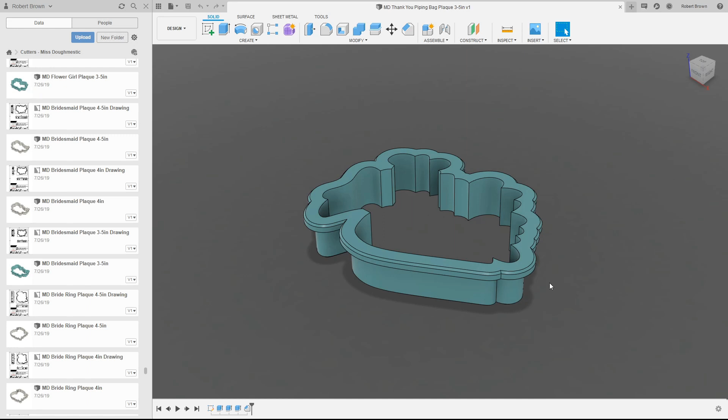These cutters will work perfectly fine. They just won't necessarily be as sturdy as you're used to with our cutters that we print ourselves. We've done this to help you guys lower your printing times. We know some people may be printing these on community printers with time limits, so we're wanting to do everything to help you get a good cutter quickly with as little material as possible.

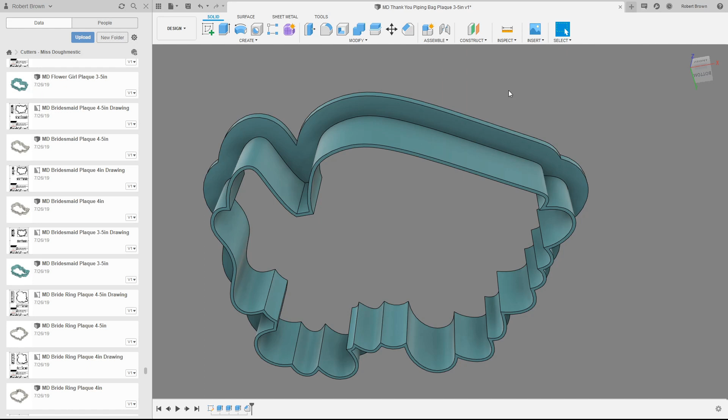Okay, so this is Cura, Ultimaker's slicing software. It is available free from Ultimaker's website. If you just Google search Ultimaker Cura, you'll be able to find it.

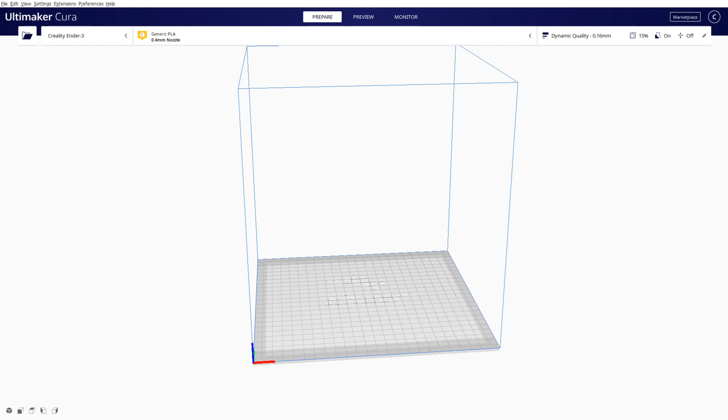So with this software, you want to bring in your model. And when you bring it in, you'll notice that it comes in with the cutting edge on the build plate. We actually want the top of the handle here on the build plate. So what you want to do is select your model, and now all your editing options are over here on the right.

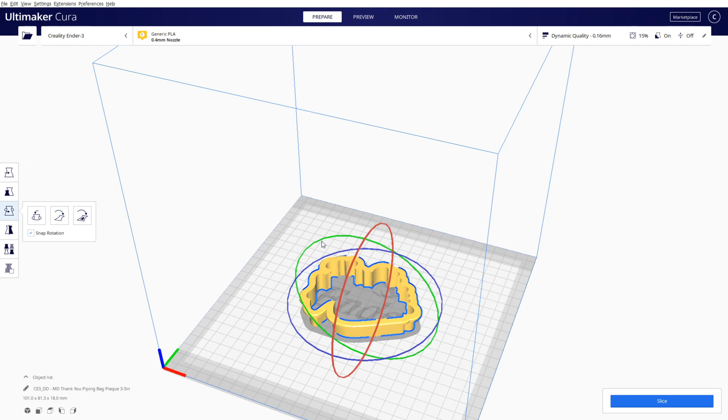This third one down is to rotate, and so you have two options. You can grab this green circle and rotate it 180 degrees, or the easier option is to select this 'select face to align to build plate' option, and then you just have to select a spot on the handle, and it will automatically lay it down on the build plate. Now you're ready to slice.

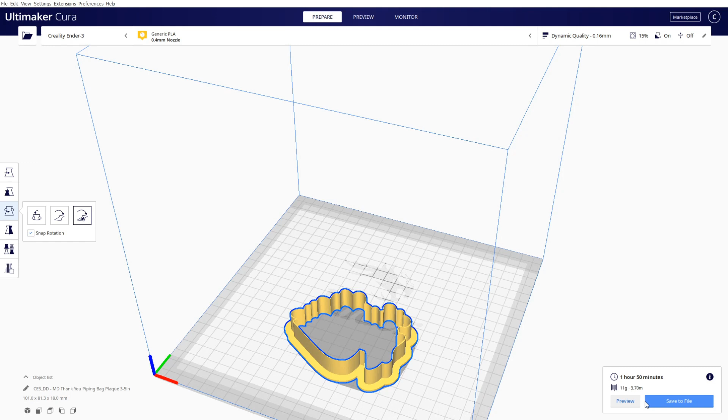And now you can save the file to your SD card and have fun printing.